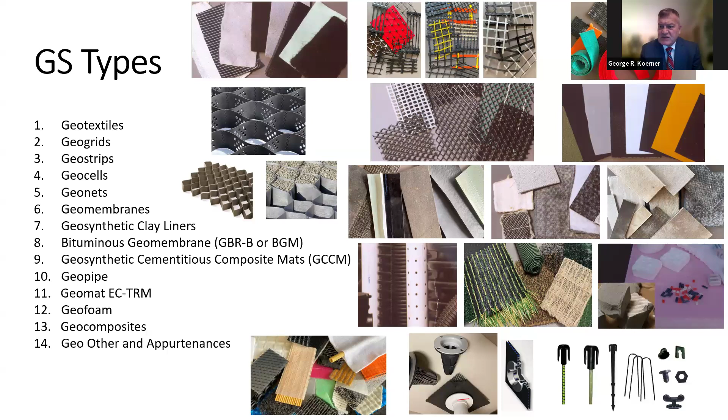But this is the 14 of them that we identified. You could well imagine in the future that this could get quite large and grow significantly beyond here. Geosynthetics, polymers used in civil engineering applications, are expanding at a great rate. As far as functions are concerned, this has expanded as well.

Filtration, permeability, drainage, separation, barrier, reinforcement, stress relief, protection, stabilization, erosion control, insulation. Then the difference between absorption and adsorption, I think you can see by the diagram. And then the point-counterpoint of resistance versus conductivity—they're reciprocals of one another. Appurtenances or connections are on this as well.

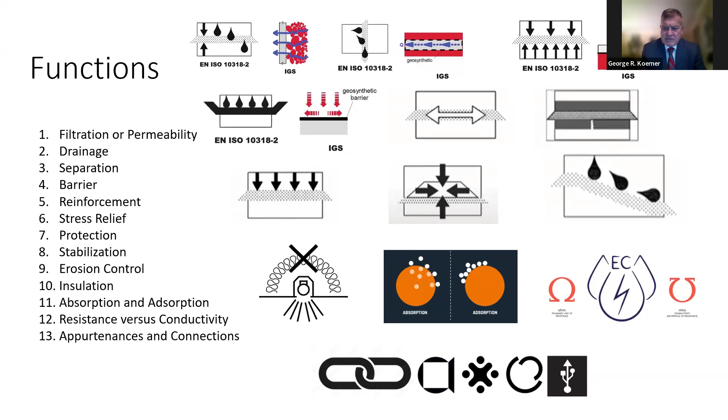It wouldn't take too high a stretch to counterpoint the types of geosynthetics versus the different functions, and that's what we did in this particular table. I can see this expanding and growing over time. Geosynthetics has grown markedly over the last 35 to 40 years, and I'm certain it would grow in the future. The second chapter is Eli's chapter, outlined here.

He did a very nice job on the design benefits of using geosynthetics in roadway applications. He then broke the roadway applications into preventing intermixing, separation, road construction over soft soil, stabilization, reinforcement, unbound aggregate, moisture control, and then asphalt interlayers.

He then broke into performance measurements of this, going into traffic benefit ratio, base course reduction factors, layer coefficient ratio, and modulus improvement—this is where he interspersed the practice and design. He would be remiss if he didn't talk about railroad applications, and that's what he did at the end. It's a very nicely written chapter, congratulations to him.

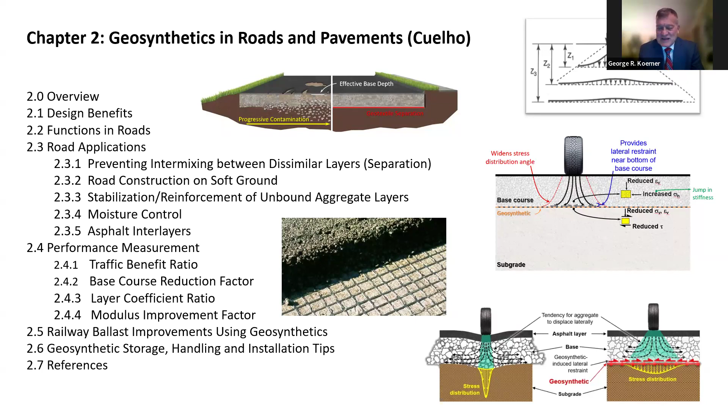I talked to him when we were in Atlanta last week, and he admitted freely he's proud of it, and he should be—it's very nicely done. The next is Drainage by Barry Christopher, and he's broken this down into advantages, cost considerations,

and sustainability, basic design for all applications, and then went into structural drainage, land mass dewatering, underground detention systems, and finally bioengineering. A bunch of different applications for this in roadways, dams, embankments, and certainly landfills. It gives a broad brush approach to this, and serves the task group well, as well as

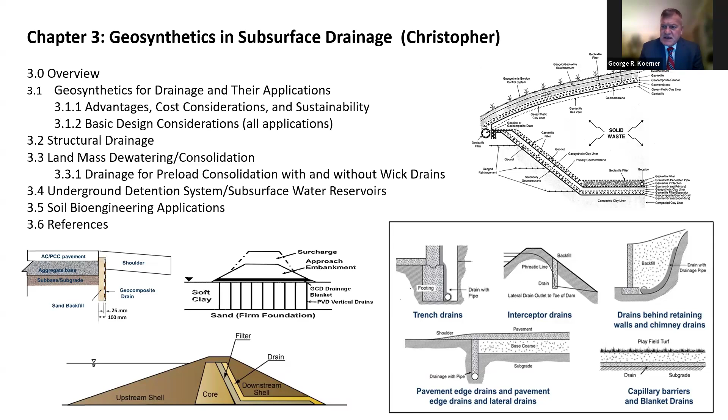had a nice review. Joel's section on erosion control and turf reinforcement mats is very far reaching, and it's really across the board with this application. He's talking about temporary as well as long-term applications, and also about

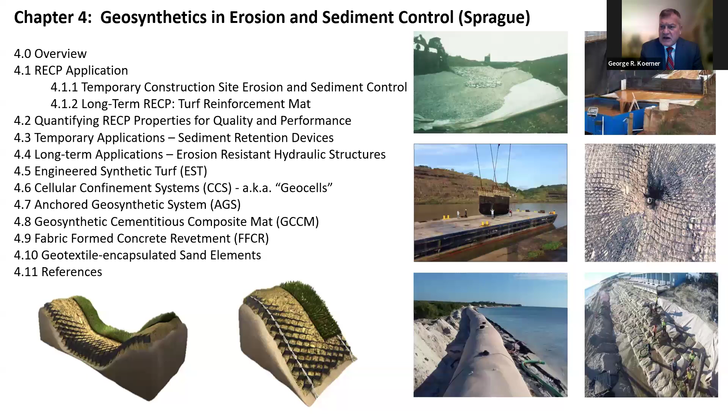canals as well as slopes. It goes into performance and quality, temporary versus long-term, and then engineered synthetic turf, cellular geocells, anchored erosion control materials, geosynthetic cementitious materials, fabriform, and geotextile tubes. A very nice, broad brush of erosion control and turf reinforcement.

I guess you're not supposed to pick favorites, but as editor, Chris Lawson—my hat's off to him. He just, as we say in the States, knocked the ball out of the park. This is a beautifully written chapter with a lot of practical applications as well as designs. Chris talks about embankments over soft soils, slopes, retaining walls, and berms.

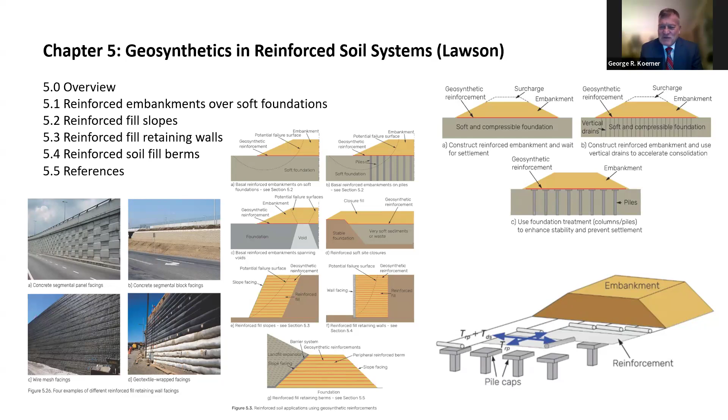Think of those as levees in the United States. It's referenced beautifully, with great figures, and really is a nice intro to reinforcement. It's a pleasure working with Chris—he's always on time, and he's just a gentleman. I wish I was closer to him. It was really an honor to have him contribute a chapter.

The next two chapters go hand in hand. Think of Kent von Maubeuge's section as dealing with water—everything from ponds, reservoirs, canals, levees. He even goes into dams. This is very nice in regards to seepage control as it applies to these different applications.

He talks about design considerations, but then the most powerful section of his chapter is certainly the installation and quality control, and he's not afraid to call out mistakes that have been made in the past. So learn from other people's mistakes.

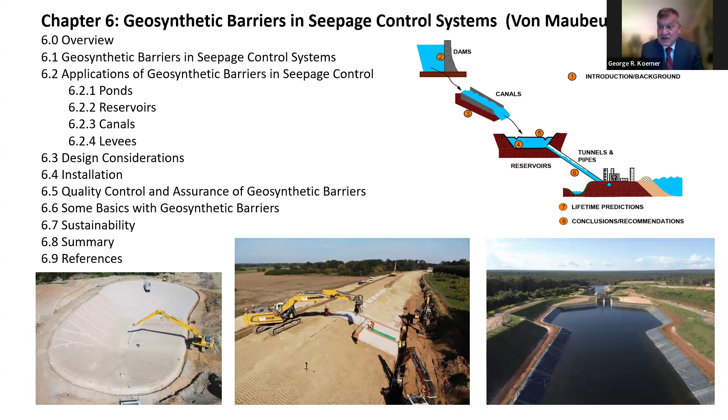This is practically done, and it's very good. It's written quite well, and congratulations are in order to Kent. I'll be in the Netherlands with them presenting this.

The section by Professor Rowe, Kerry Rowe, is on environmental protection, considerate waste containment. This chapter is written radically different than anything else, and I enjoyed Jonathan's review. He says, don't touch it, leave this thing alone. It is very nicely done by Professor Rowe. It emphasizes a lot of his work and his students' work at Queens, but is very nicely done in landfill, mining, and impoundments containing waste. It is beautifully referenced and well written as many of his documents, and certainly counterpoints Kent's chapter quite nicely.

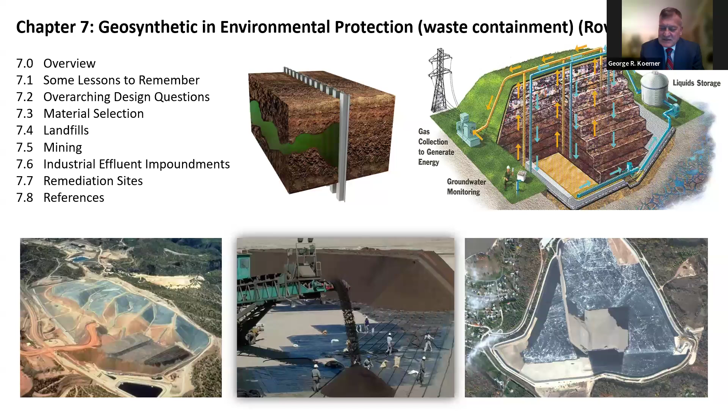I'll stop sharing now and hand it off to Professor Abdullah.

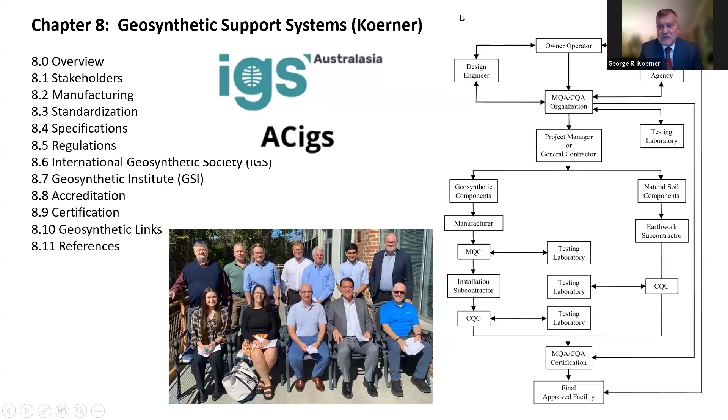Thanks, George. Hello, everyone. I'm happy to be here with the IGS members alongside George and Sam to talk about the handbook. I'll be focusing in my part on the IGS Education Committee and its role in the final stages and editing of the handbook.

We aim to both promote and develop education on geosynthetics to help promote the use of geosynthetics. A very good example of that is our participation in the handbook, but also our current efforts in the professional development courses Sam will discuss in his part.

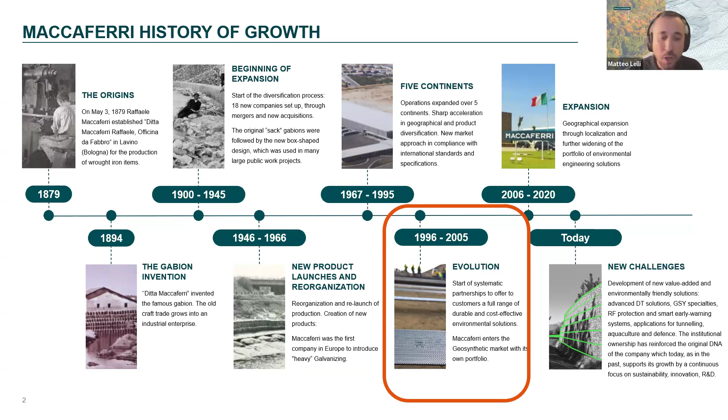Pretty exciting for us, since the beginning of 2025 Maccaferri has established a direct presence in Australia. Now we have a local company, Maccaferri Australasia Private Limited, and we can support the local market with in-country technical assistance, direct supplies from our Australian stock points, and serve projects across all the states. Very exciting for us, if you want to reach out and chat to us.

Our objective as a company coming into Australia is really to try and bring fresh ideas, proven international best practices, high quality solutions, high quality materials, and bring all this into the local market.

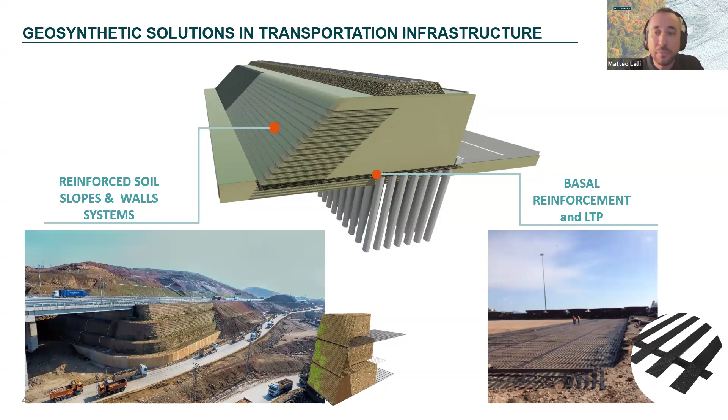About solutions, as has been mentioned before, geosynthetics can offer a number of important advantages, for example in transportation infrastructure. They can provide a more sustainable solution by reducing the need of imported materials, or improving speed of installation and environmental impact. A typical application in transportation infrastructure is using geosynthetics for load transfer platforms or basal reinforcement, when building embankments or structures over soft and compressible soils. Maccaferri is involved in delivering directly this type of solution and assistance in the local market.

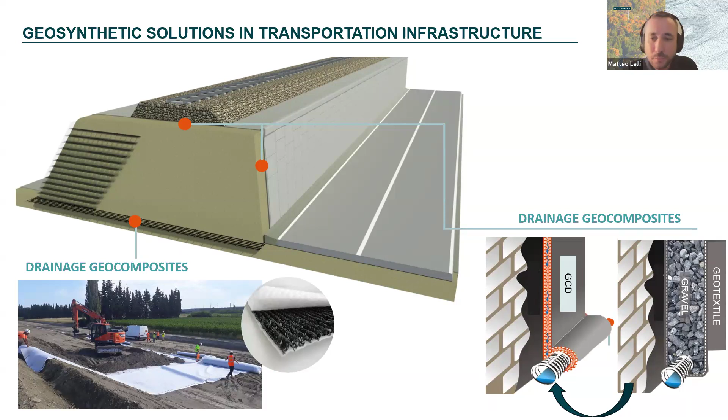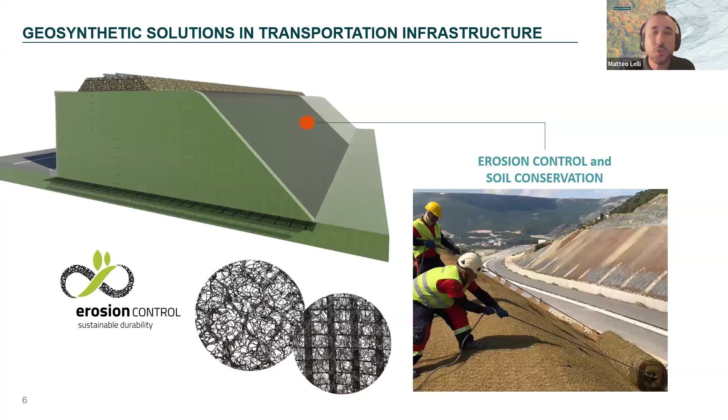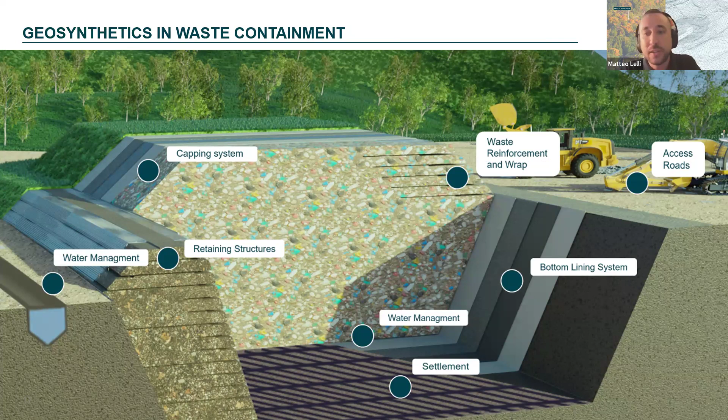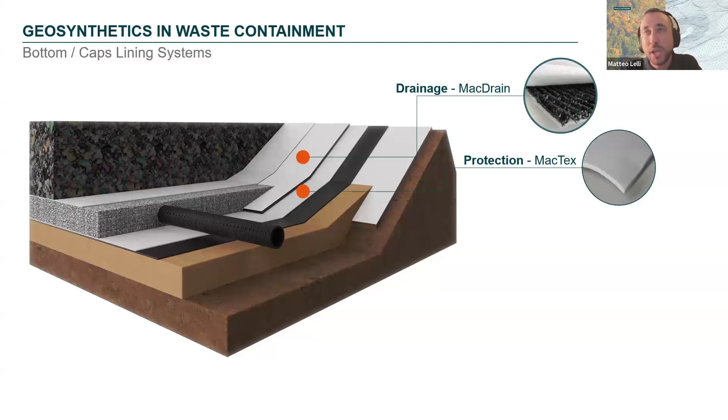Last but not least, landfill and waste containment is another area where geosynthetics have delivered significant benefits, especially in Australia and New Zealand. Those countries are recognized globally as very strong for the advanced approach to landfill barrier design, and Maccaferri can and wants to contribute to this sector as well by bringing fresh ideas, alternative solutions, alternative methods, and high quality systems and materials. We can, for example, provide technical support and materials for bottom linings and caps in the areas of drainage, protection and cushioning, and waterproofing and barrier.

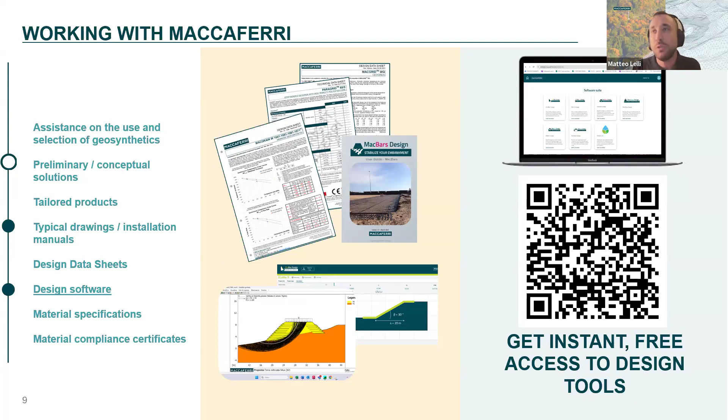Last but not least, what Maccaferri can offer here in Australia includes assistance on the use and selection of geosynthetics, preliminary conceptual solutions, manufacturing tailored products, typical drawings, installation manuals, and design data sheets. Very importantly, I've put a QR code on the right-hand side here, we have a large database of free software that we have developed for specific applications involving geosynthetics, for example soil erosion control, drainage systems, and basal reinforcement. I invite you to check it out.

We don't have any questions as yet, but I thought I'd start off with two comments. When we get fresh grads who start work with us, they inevitably struggle to differentiate between a geotextile and a geomembrane, and that's just because of the level this topic is covered at university. So I've got a box, and I sit down with them and show them the difference, let them feel it, and speak to them about where the various ones are used. I really see the handbook as fitting in just after that, so they've had a first feel of what the materials look like, and then they can read about what they are, how they're used, and all the various ways they can be used in their project. I think it's a really good first step for a young grad to go through, and I would give it to them along with the local regs for, in my industry, waste containment, and they can read the two together.

And that brings me to my second point. I do remember putting in comments back to George that I don't think Kerry's chapter should be touched at all, because there's a whole bunch of stuff that if I'd known earlier in my career, it's crystallized in Kerry's chapter. There are real nuggets of wisdom in there that any designer, young or old, would find really useful and would prevent things going wrong on sites. So that's my two comments. Really glad to be involved in the process through the TC barriers when we did a review of the chapters, and really great to see it out in the world.